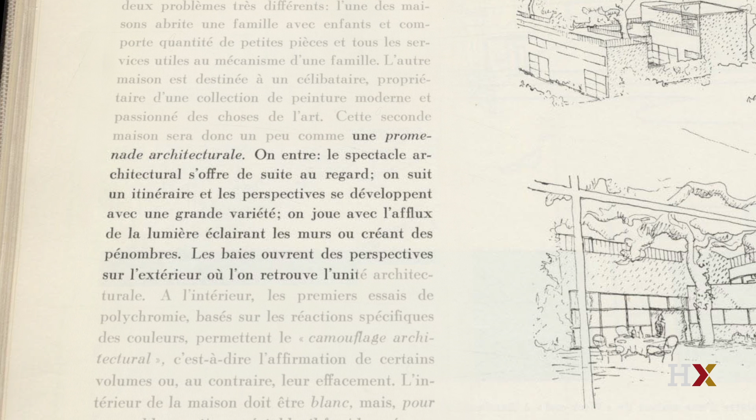You enter. The architectural spectacle at once offers itself to the eye. You follow an itinerary, and the perspectives develop with great variety, developing a play of light on the walls or making pools of shadow. Large windows open up views of the exterior, where the architectural unity is reasserted. Here, reborn for our modern eye, are historic architectural discoveries: the pilotis, the long windows, the roof garden, the glass facade.

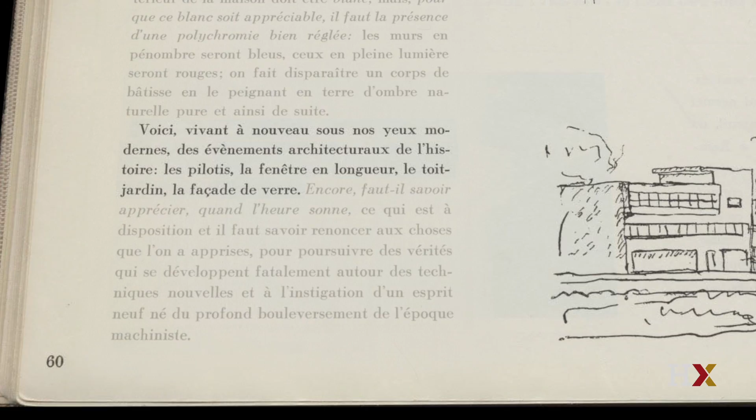Le Corbusier is describing the Villa Savoye at Poissy. While at the Villa La Roche, the spatial articulations of the interior were conceived in relation to an exterior that was still itself plastic and still could move around and be varied. Now at the Villa Savoye, the villa has become a total object through which the will of the epoch could be affirmed.

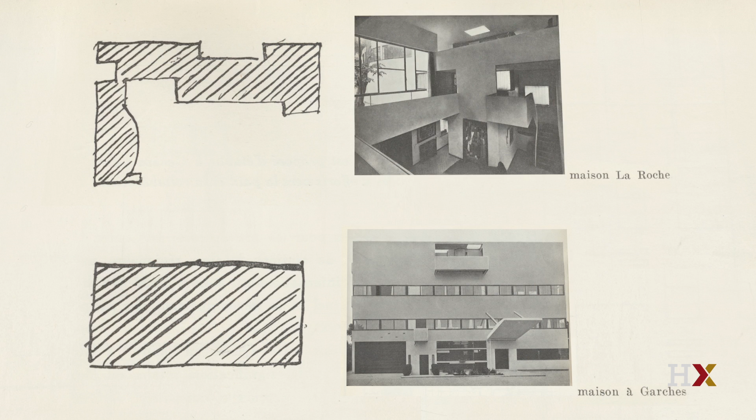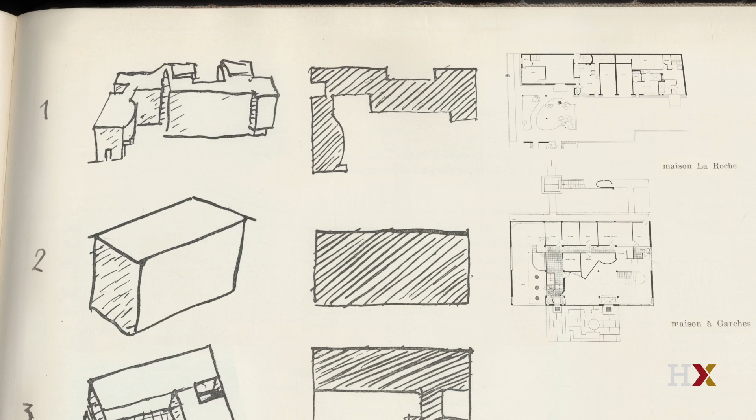The signs of purist composition that we saw in the prospects of frontality at La Roche and through the kind of energetic swirling at Garches here take on a more material consistency. At the same time, the prismatic envelope of Garches is reasserted to contain the equal variability of surfaces at La Roche. The architectural solutions of this elementary ribbon window of the enclosed terrace become a kind of insistence of this total object.

And at the same time, while we have this kind of functional minimalism of the interior, almost like railway sleeping cars, like ship cabins, like airplane cockpits, there is an architectural solution that shows its real concern to be the relation of people to these new conditions.

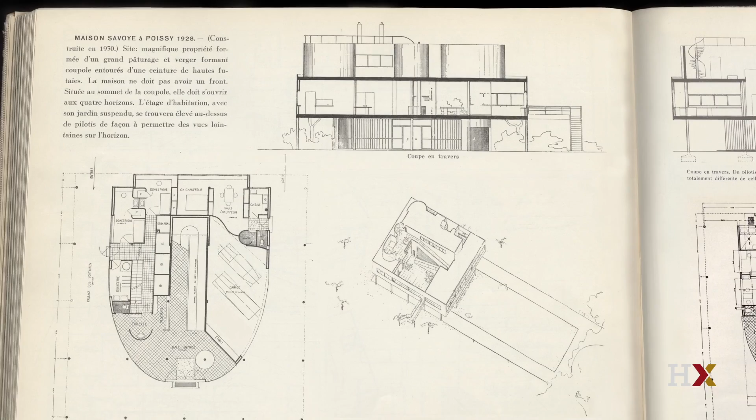The Villa Savoye is the epitome of the functional stratification of the section, of raising the pilotis, freeing the ground plane for movement, for transportation, for recreation, for vegetation. The house above is completely ordered and controlled, while the earth below is free and available for collective occupation, for collective use. And now, for the first time at the Villa Savoye, is a coupling of objets types, of which the Villa Savoye is only one.

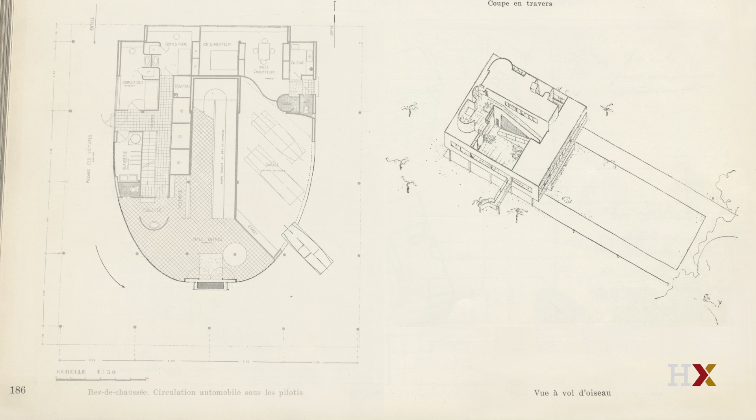For example, the automobile, itself a paradigm of the objet type, now comes into the site and moves under the building through the pilotis to interact spatially and functionally with the house itself. At the entrance level, the curved surface of the industrialized glass, which defines the volume of the entry hall, is itself determined by the turning radius of the automobile. Here, two object types come together and interact.

As you penetrate that glass wall and enter the entry hall, you see first, on the one side, a ramp that leads you up to the piano nobile, up to the main floor. Adjacent to the ramp is a sink assembled together with one of the pilotis, a very large industrial lamp, and a table attached to the pilotis. There's a kind of assemblage of objet type.

The sink itself is a mass-produced, highly refined, functional vessel for cleansing that stands almost like one of the objet types of his purist paintings. And the sink is juxtaposed, like in an assemblage, with this industrial lamp, which at first seems out of scale. It doesn't seem domestic at first, but it gets domesticated in its assemblage by its interaction with the small table, with the pilotis, and with the sink.

But the combination of sink and ramp, as unusual as that is, is not just two industrial types coming together. The place that you find the combination of sink and ramp is at the entry to a religious building, like a mosque or a synagogue or a church, where you first cleanse yourself and then enter slowly and ascend to a sacred space. The juxtaposition of these various object types creates a kind of metonymic relationship or an assemblage that makes connectivities that extend the domain of the house itself out into the industrial world.

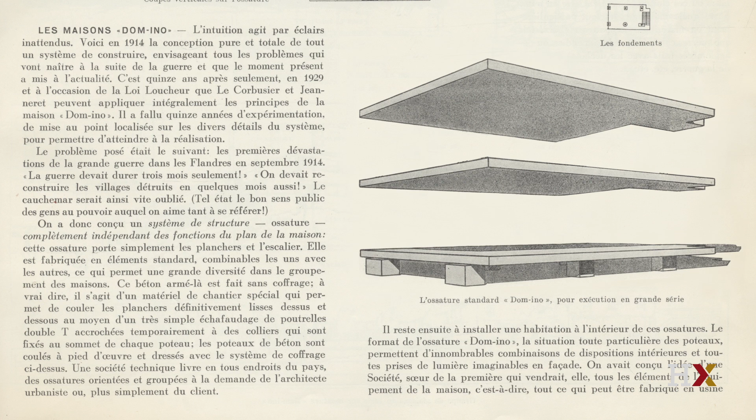The architectural promenade begins at the moment of stasis where the sink and the ramp have come together at the entry. Remember, the architectural promenade is the name Le Corbusier gave to this itinerary of movement, rotation, and frontality through a building. In the case of the Savoye, the ramp becomes the instrument of that architectural promenade, and it operates in two ways. First of all, it operates as a path or as a space, a vertical space that cuts through the horizontal slabs. In the Dom-ino system, the horizontal slabs are determinate, and you move through those through a stairway or other circulations.

But the ramp cuts through those horizontal slabs and establishes a vertical slice of space that unites the slabs in a different way than the stair. Now, it is the case that even at the Villa Savoye, there's also a stair that provides a parallel but different kind of vertical circulation through the horizontal slabs.

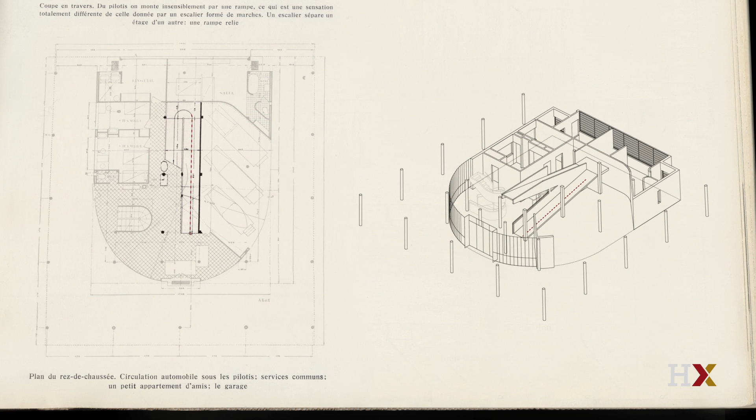And that combination of ramp and stair, they're actually very, very close to one another, and they connect with each other as you move through. That's also an important apparatus of the architectural promenade. So as you get on the ramp and go through and then turn around and come back still inside the house, but at the top of the second part of the ramp, you reach a moment where the stair has also come up and made a landing. So the ramp and the stair connect at that point.

At that landing, you have a choice. Either you go into the main living space of the house, or you move through the glass curtain wall outside into a very large terrace. That living space and the terrace interact in a very porous and transparent way. There's almost no distinction between the space of the living room and the space of the terrace. And indeed, in good weather, you could slide the glass doors open and it would become the same space.

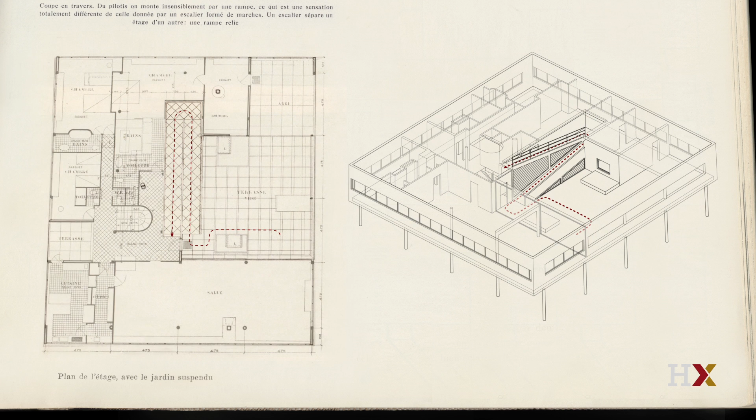The ramp then moves from an interior ramp into an exterior ramp that looks out onto the terrace. It again loops back on itself one more time, and you get to the top of the ramp, which is at the highest point of a second roof terrace, where Le Corbusier put a warped kind of curvilinear surface punctured by a single aperture that frames a view out into the distant fields and woods beyond.

So you've moved through an environment of industrialized glass, of industrialized lamps, of automobiles, into a more refined space, but still a kind of minimalist space of white walls, out onto a terrace, and then moving up into an area that you get glimpses now of the natural landscape, and then finally to the final moment of pause at this aperture where the landscape opens up.

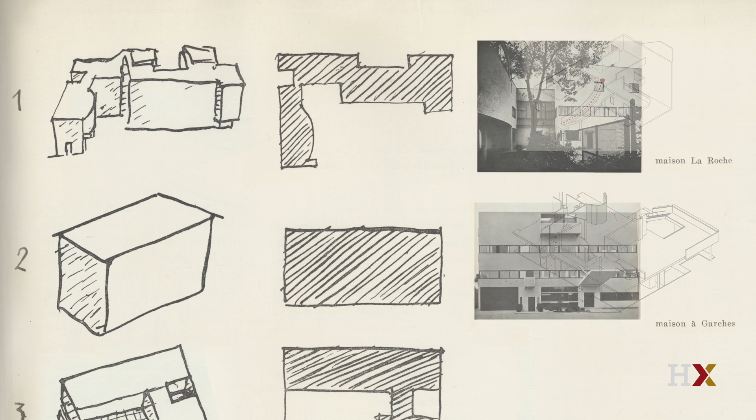In Villa La Roche and Villa Garches, there is this itinerary of rotation and frontality. There, the rotation is initiated by the surfaces of the walls themselves, by balconies puncturing through the walls, by apertures in the walls, by a curvilinear surface that comes and confronts us and makes a kind of pressure on the space. So the wall's surfaces control that or apply that rotation. In the Villa Savoye, the ramp becomes the armature that more immediately and strictly controls that rotation. But it still opens up variability.

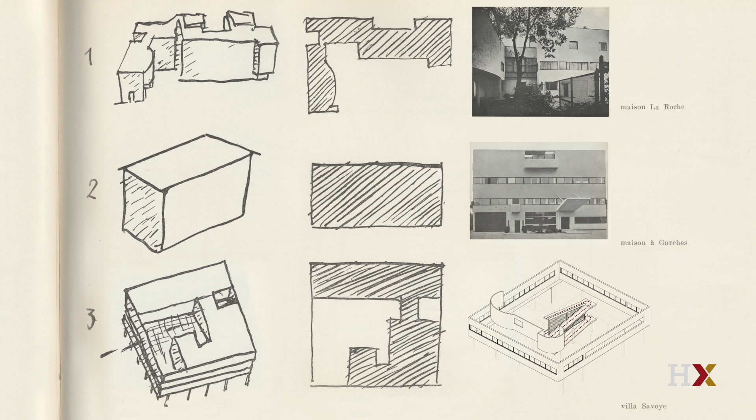Now it's not just the variability of the walking through the space, but it's a variability of vision that is constantly framed by the interaction of the ramp as an armature with the vertical walls and apertures as framing devices. And as you move through the house, moments not so much strictly frontal, but now framed in a more variable way. Moments are framed and pauses are caused because of the ramp itself and its interaction with other parts of the house.

The ramp is the primary device that Le Corbusier uses to connect different parts of the house, setting up these interactions with different parts of the house. The ramp diagrams potentials for occupation, but the ramp is also a device for connecting with conditions outside the house, what Corbusier would consider the eternal goods like access to the earth, access to the sky, open air for physical health. All these are made possible by what he called a machine for living, a machine, this object type, the house itself, that diagrams potentials for occupation.

The diagram, which is the house, constructs a world, but it's not just an immediate world. It also is a world yet to come. The machine for living constructs a real world that is yet to come, a new type of reality, a reality that will find its ultimate fulfillment in a future.

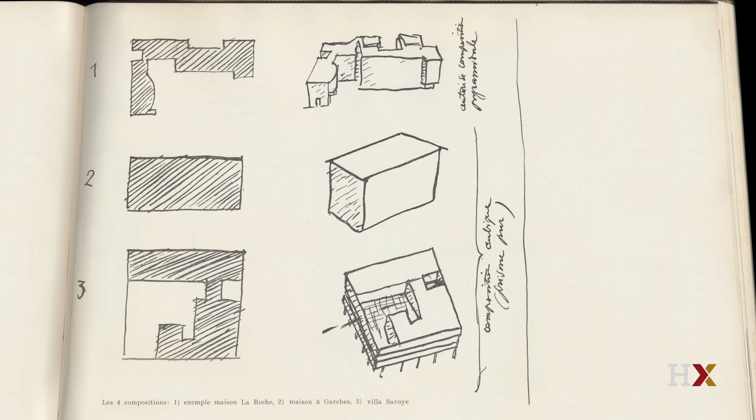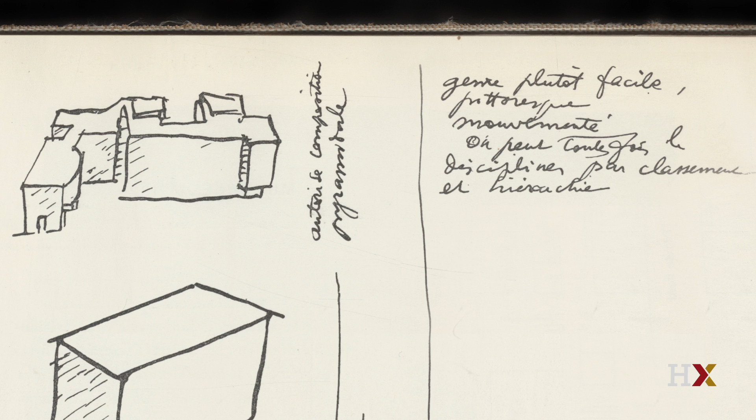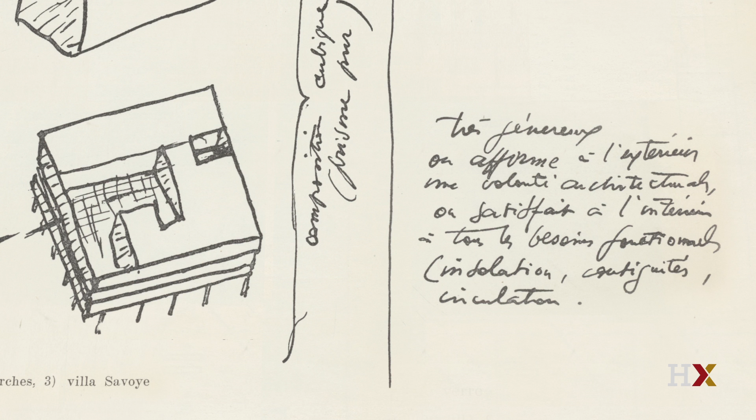In 1930, Le Corbusier pondered over the houses he had built over the previous decade. And he singled out what he called compositions, which are the different ways that the houses had responded to the initial Dom-ino diagram. He contrasted what he called the somewhat facile, picturesque, and hectic genre of the Villa La Roche to the very difficult design of the prism of Garches, which then led, he said, to the spiritual satisfaction which came at Villa Savoye, the very easy, practical, combinable type, which was the synthesis of the genre that had begun with the Dom-ino. It was the machine for living in the new world.